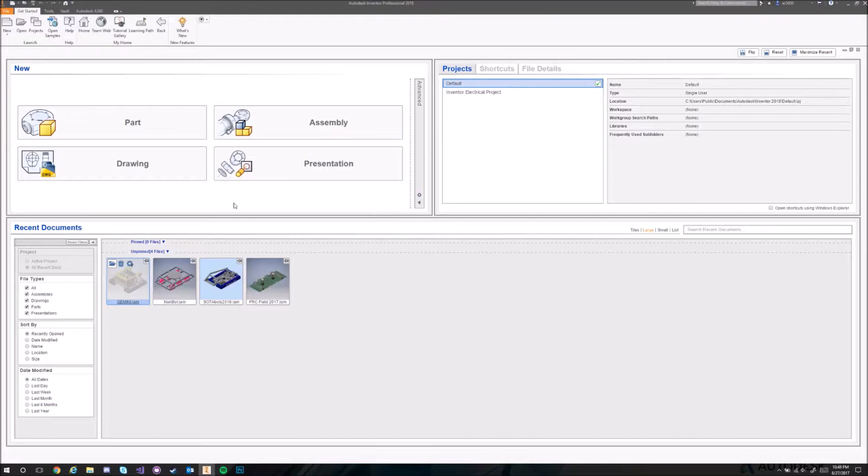After integrating the old robot exporter into Inventor, we decided that the process still was a bit confusing, so in response we added the new guided export mode, which opens up a wizard to help you through the whole export process. I'll demonstrate that for you guys right now.

To get to the robot exporter, click the Environments tab and click Robot Exporter. Now just click this dropdown and click Begin Guided Export. It'll export the meshes for you, and then it'll have you name the robot when you're done, so I'll just skip to that. I'll name this robot Gemini.

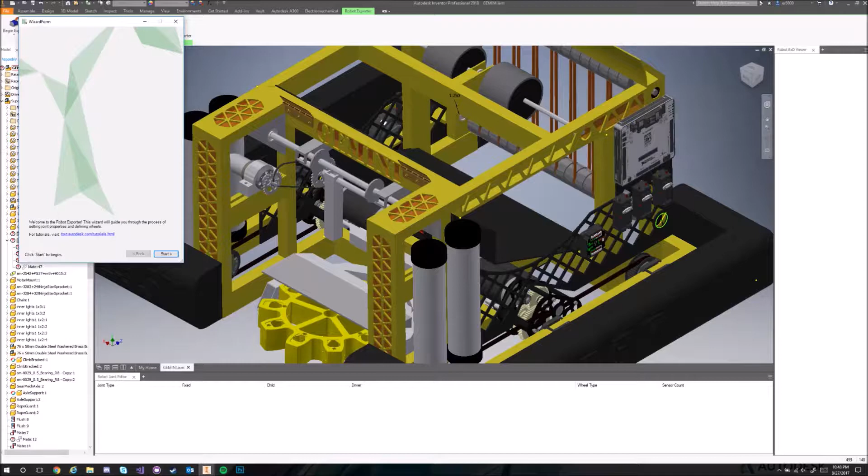Okay, so now here we are with the wizard. We'll just click Start to begin, but if you click this link, it'll take you to our tutorials page. Alright, so all this stuff you don't have to worry about—that's already predefined. You don't have to set your team number or anything.

I'll select a custom drivetrain since this has 2 Omni wheels, and then set the wheel count to 6 because we have 6 wheels.

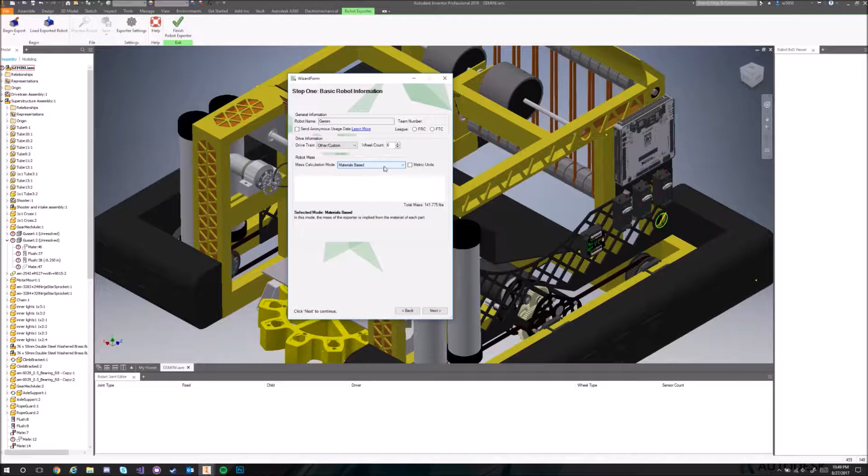Now this is where you can choose how you want to do things. If you know the mass of your robot, you can just set it here, or you can do it based on materials, although that has a tendency to be a bit too heavy because the default material in Inventor has the density of water, and our robots most certainly do not. Or you can actually set it node by node—if I know how much each wheel weighs, I can set the weight of that, and if I know how much this gear pickup mechanism weighs, I can set the weight of that. But the easiest way to do it would be this way.

So I'm just going to do that, set that to 100. It's weighed around 100 pounds, I'm not really sure. And then, yeah, that's it.

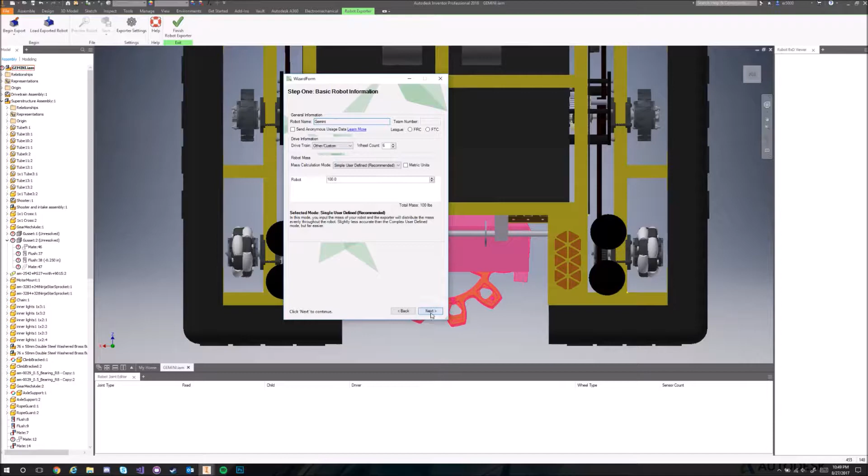Click Next. Now it has 6 empty wheel slots, so I'll just select each wheel. This wheel and this wheel are both Omni wheels, so I'll set them accordingly. Then we have to set which wheel is left and which wheel is right. Let's just say this is left—doesn't really matter as long as it's consistent—and then this is right.

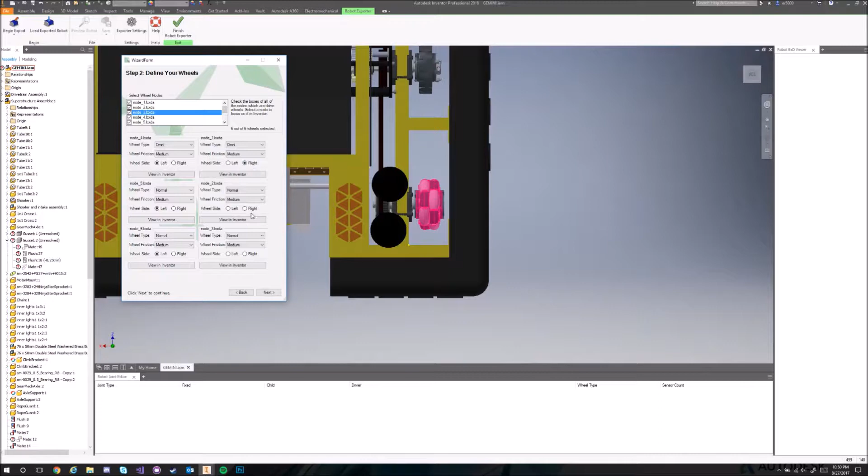Okay, so we can move on to the next step. Now it presents us with the rest of the moving parts. This really doesn't do anything, so I'm going to merge the node into the parent. You don't have to do this, but it just makes it a little faster—not really all that much, but then we'll do it again here.

And then now we'll select the joint driver. So those of you who use the old exporter will find this a little bit familiar, but it should be a little easier. You don't actually have to set the PWM port yourself—you can have it auto-assign it, so that's what I'm going to do here. And then also set the degrees of freedom.

So I haven't really done this one before, but I think it's like this for this particular one. Oop, that's backwards. All right, so, oh, I do not want to do that.

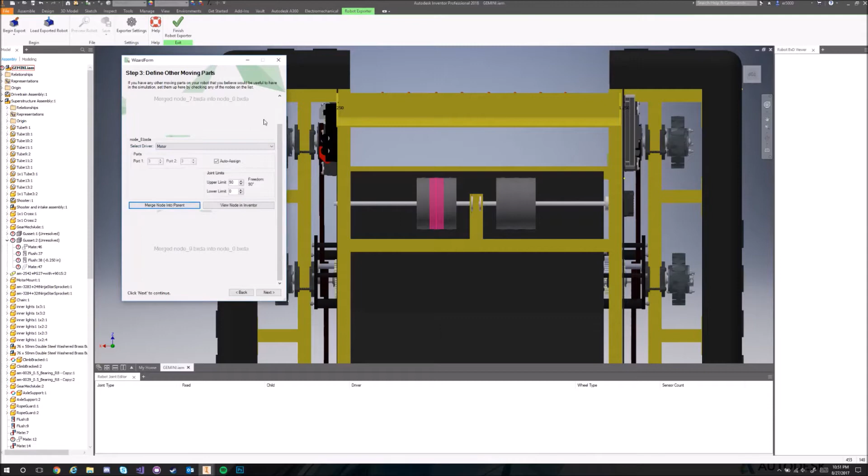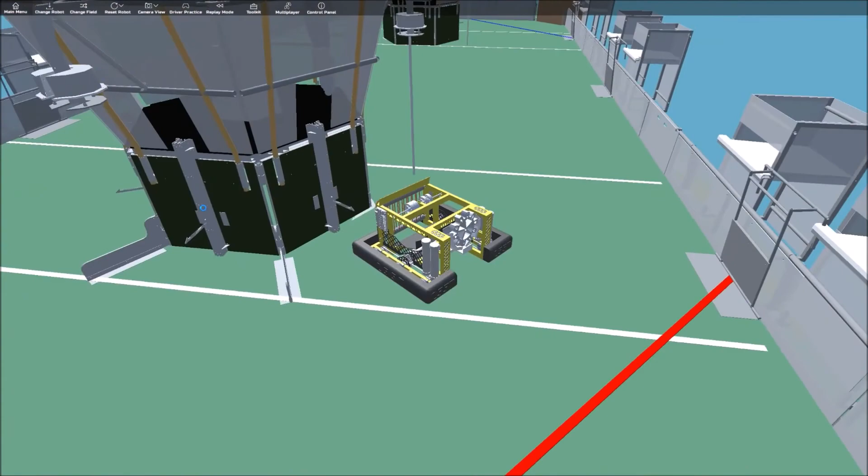Okay, so now we'll just move on to the next step, and let's just launch straight into Synthesis. We'll save that, and boom, here we are in the simulator. So as you can see, I set the limits incorrectly, but the robot drives fine. It might take a little fiddling to get your limits set correctly, but yeah, that's the guided export process.